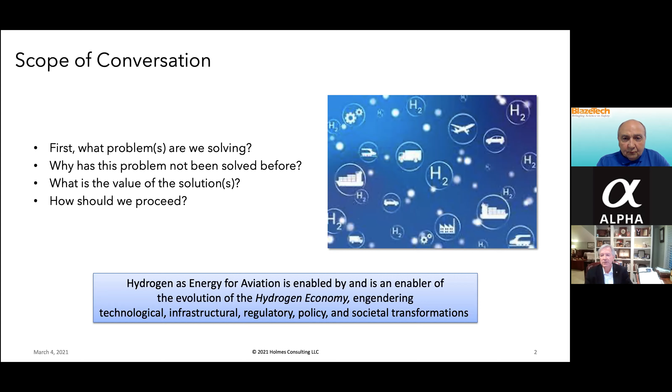I'm going to suggest as a hypothesis that hydrogen as an energy source for aviation is both enabled by and is an enabler of the evolution of the hydrogen economy, of course, engendering along the way the technological, infrastructural, regulatory, policy, and societal transformations that go with it.

Along the lines of what problems we're solving, you can ask this in different ways. Why hydrogen? Well, the obvious ones are air quality, energy independence, and geographic equity. I mentioned earlier that the potential for hydrogen to become divorced from geographic locations is a very important feature of this landscape. And then finally, what appears on the horizon - it may be some decades away before we have gallon-of-gas equivalent pricing - but the affordability of renewable hydrogen generation capabilities, including liquefaction for aviation applications of liquid hydrogen.

What I'd like to talk a little bit about is why hydrogen for advanced air mobility. We're all pummeled every day with emails and web information about the electrification of air mobility, variously called regional air mobility, urban air mobility. I'll say a few more words about where I think the focus can be in the early days of this transformation. But why hydrogen for advanced air mobility?

What I experienced in the few years I spent as Chief Technology Officer at Alaka'i Technologies Corporation, in our development program for a liquid hydrogen powertrain, electric powertrain system for a hexcopter, aiming at about a 1,000-pound payload and a couple of hours of endurance, was the benefit at that weight class.

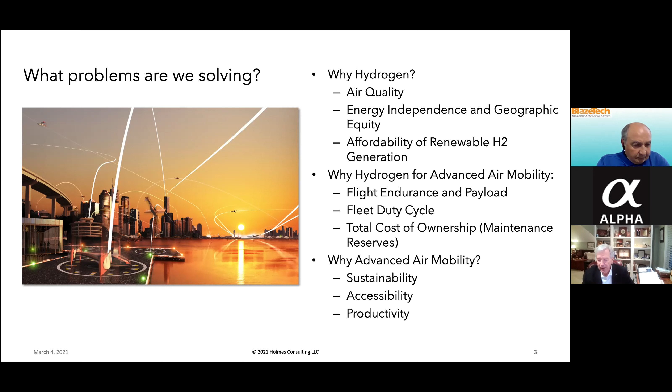So where is hydrogen in service today? I'm fascinated to learn more and more about the implementations that currently exist for hydrogen, and some that are coming along fairly rapidly. I had been unaware there are 40,000 forklifts in the US at about 80 distribution centers, about half of which are owned by Walmart and Amazon, and all of those forklifts run on liquid hydrogen. So there's already a liquid hydrogen infrastructure out there. And if you wanted to do cargo air vehicles between and from those distribution centers, there's a bit of a ready-made potential in that regard.

The cell towers in the country have backup power systems. They had mostly been diesel gensets, and the industry is moving gradually away from those - there are 4,000 cell towers that have backup power provided by hydrogen fuel cell systems. The numbers are small: there are only 1,300 as of 2020 buses that are hydrogen fuel cell powered today. There's a fairly small number of cars that are hydrogen powered today, and a fairly small number of hydrogen refueling stations, mostly in California, but some developing in Massachusetts and a few other states as the hydrogen automobile industry begins to develop some traction.

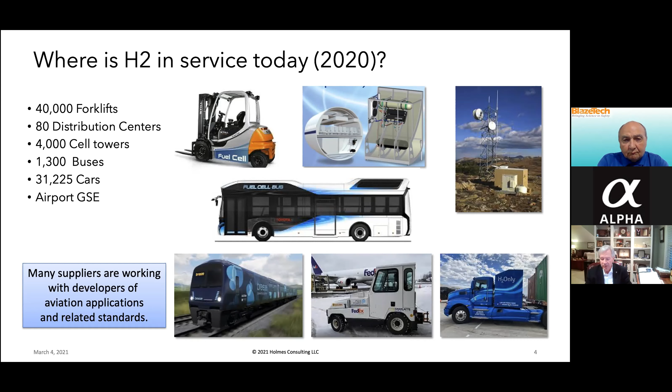Well, the state of the art is, let me just say, minimal today in this regard. Hydrogen fuel cell powertrain technology readiness levels, the TRL scale we're all familiar with, for electric motors is probably fairly high, TRL 5 and 6. There's still much work to be done to advance electric motors in particular - if we can get away from liquid cooling of electric motors for aviation applications, that would be a marvelous advance. Liquid hydrogen tanks for aviation applications are still at a fairly low TRL level, as are fuel cells themselves for aviation. Of course, fuel cells for terrestrial applications are already TRL 9. But then the integrated heating and cooling systems for fuel cells as well are still at a fairly low TRL level.

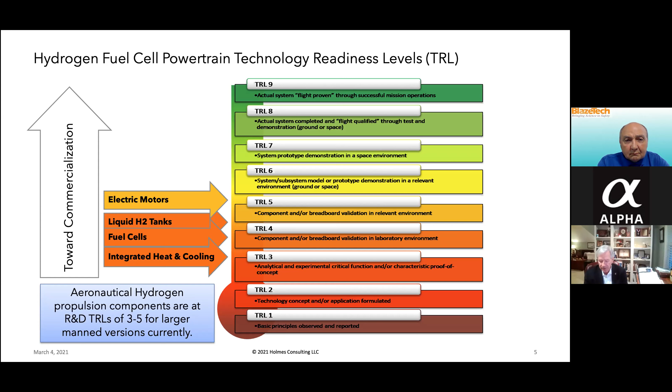So there's much work to be done there to move toward commercialization of hydrogen fuel cells in these aviation applications. So how should we proceed? I'm going to suggest that we start, and many are already, starting with regional, rural, exurban, emergency cargo service applications for air vehicle development. Why? Well, in my opinion, there's a great alignment of hydrogen benefits with mission profile needs.

Those missions require hours of endurance and north of 1,000 pounds, maybe even north of 1,500 pounds of payload, resulting in vehicles of 4,000 and 5,000 pound MTOW class. And so hydrogen provides you with the energy densities necessary to meet those mission needs.

There are also lower technical and regulatory barriers to entry, not the least of which is airspace management in those rural, regional, ex-urban and so forth markets.

There are also more than 5,000 public use airports in the nation today, and there's some interesting statistics around that. 80%, maybe more than that, but I'm going to be conservative, 80% of the nation's population lives within a 20-minute drive of an airport. They're not big airports, of course, but that infrastructure could serve as nodes in a hydrogen infrastructure, especially if the hydrogen infrastructure in those airport facilities could be ecumenical, so to speak. In other words, could serve trucks and automobiles as well, and be used to generate electricity for battery charging.

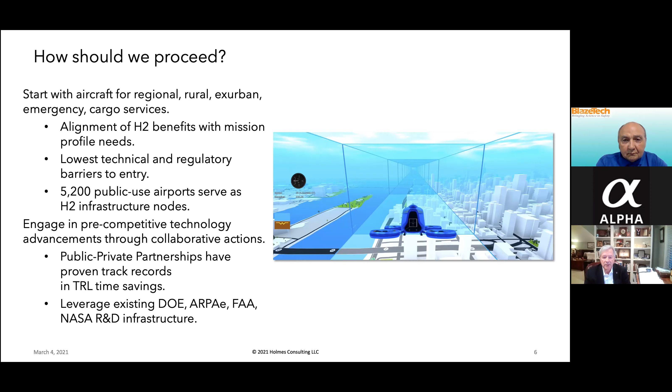So with that, I'll close my remarks and hand the baton back and look forward to the rest of our conversation. Thank you, Bruce.

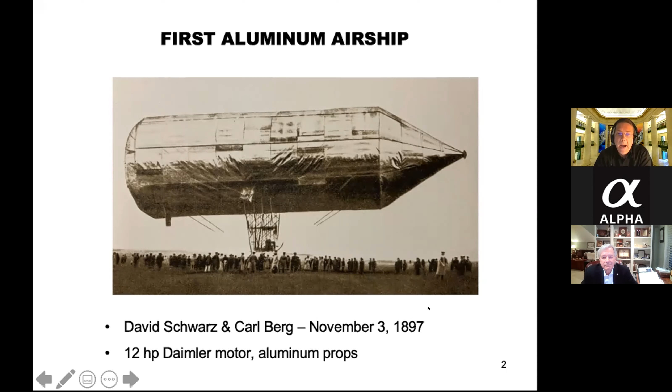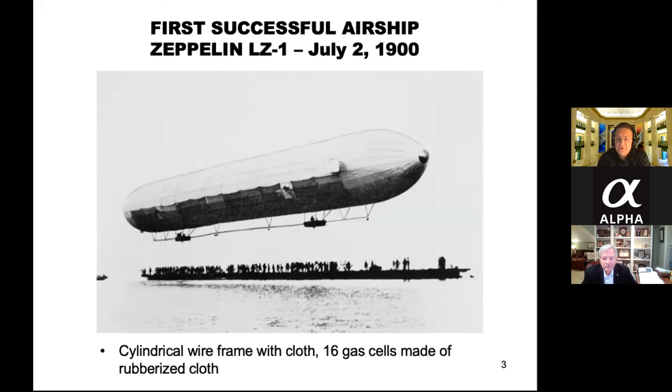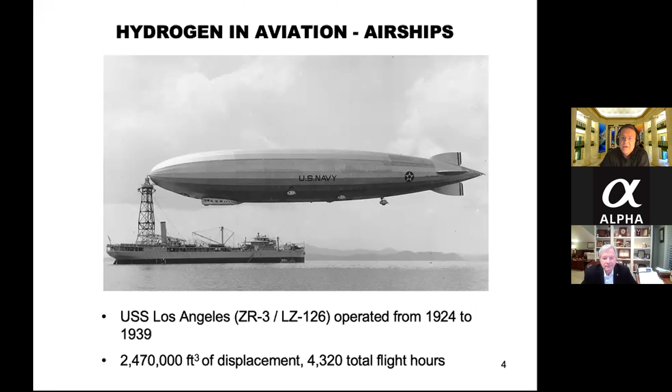So just to summarize the aviation by airships, a total of 120 Zeppelins were built. The most notable one that people know of is probably the Graf Zeppelin, 9 years of service with hydrogen, bigger, 3.7 million cubic feet of displacement, 144 ocean crossings, transported over 13,000 people. It was long trips, from Germany to South America, but this was the way to travel.

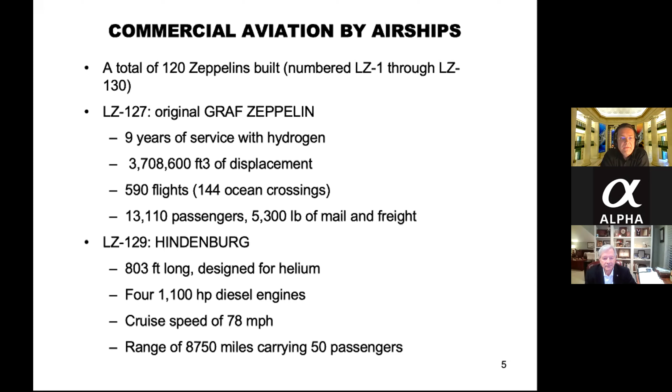And then, of course, the Hindenburg. It was actually designed for helium, despite the US ban on the export of helium under the Helium Control Act of 1927, so it was then operated with hydrogen. As you know, in 1937, there was the Lakehurst accident. But again, 50 passengers, a range of 8,750 miles.

Now, if you fast forward to the mid-50s, it's when Lockheed was working on plans for supersonic reconnaissance aircraft, the Lockheed CL-400 shown here, codenamed Suntan. The goal was to be faster and higher altitude than the U-2.

All this enabled by liquid hydrogen. This is designed by Kelly Johnson at Skunk Works. Unfortunately, it never materialized. There were other issues.

You can see the engines are on the wingtips. There's some serious yaw moment issues when the engines or the inlets unstart. This is also a challenge for the SR-71 or the YF-11 and 12 demos later.

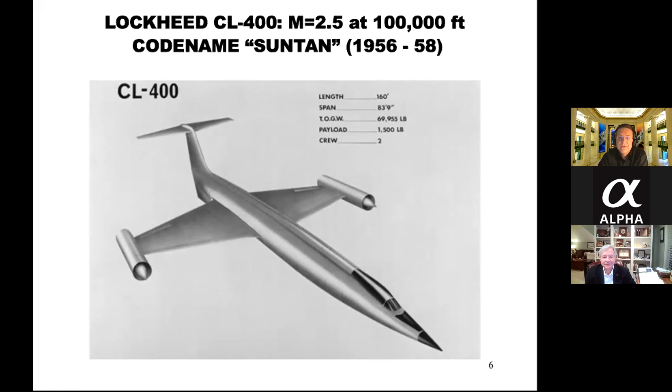Just one shot on the mission profile. Again, a little bit shorter range than the U-2, but higher altitude at 100,000 feet. Supersonic cruise at Mach 2.5, and a sortie of less than an hour. So a very impressive mission profile.

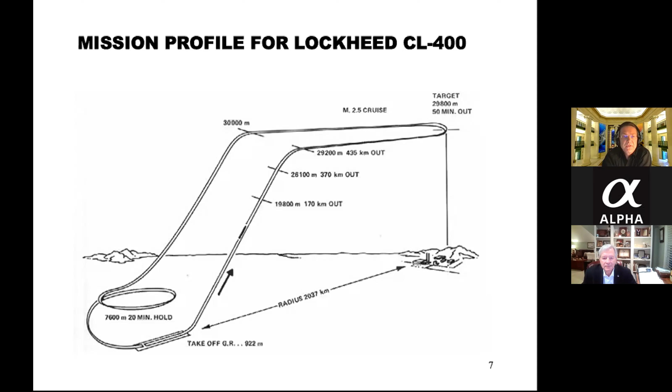This is the engine, the PW304 or Suntan liquid hydrogen engine. And there's a person there to give you an idea of the size.

There were, of course, a number of challenges that had to be overcome. As you know, liquid hydrogen is extremely cold. At atmospheric pressure it boils at, I think, around 415 or 20 F. So conventional materials like steel become brittle. Of course, the advantage is the heating value is 3 times that of jet fuel. The specific heat is maybe 15 times that of air.

So for this particular engine, I think there were 3.5 pounds per second of liquid hydrogen run to produce 12,000 horsepower to drive the fan. And of course, another challenge is the low density, so the tank volume had to be about 5 times that of jet fuel.

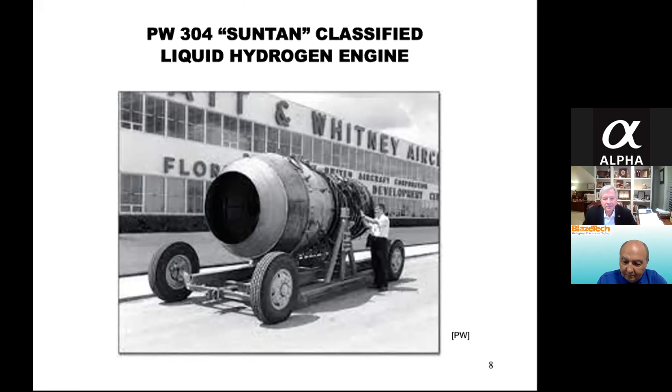It ran on an expander cycle. So here's the engine and there's the cartoon. If you start on the bottom there's a liquid hydrogen pump, external. It's in essence driven by a front tower shaft. It pressurizes the liquid hydrogen to supercritical pressure.

And then if you can see my cursor, there's a heat exchanger to raise the enthalpy. And then that hydrogen expands over a turbine. It's a tiny turbine, so there's a gearbox that's needed between the fan and the turbine. And then that hydrogen partially goes into the primary burner and then the rest goes into the afterburner. So basically, it's somewhat a core of a rocket engine. If you think of the compression fan being replaced, the LOX turbopump and that feed line.

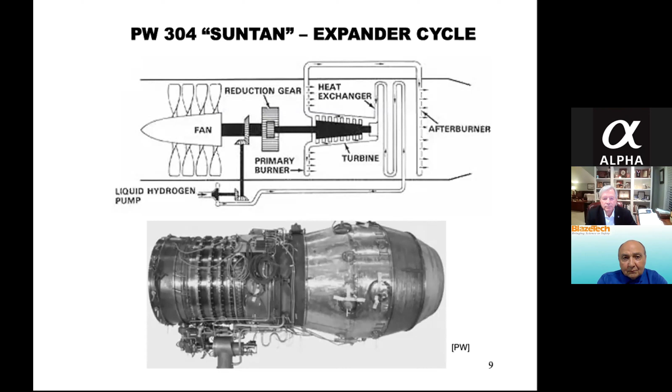Here's a picture of the 12,000 horsepower reduction gear. I think the turbine ran at 25,000 RPM, compressor maybe at 6,000. So an impressive piece of engineering back in the 50s, maybe the origins of the gear for the GTF.

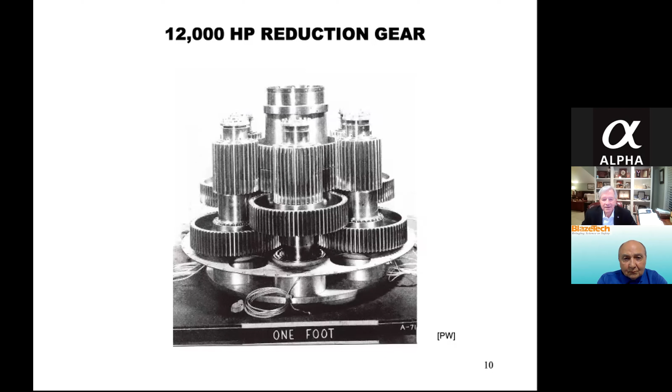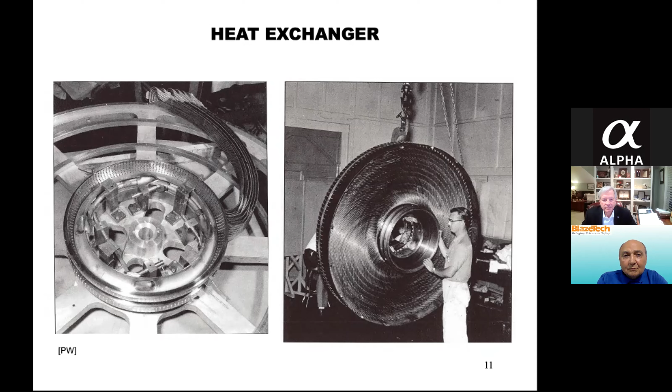And then, the hydrogen came in, you pressurize it still at 20 Kelvin. The heat exchanger took it up to 1,000 Kelvin, and then combustion gas entered the turbine at maybe 1,500 Kelvin. So lots of heat transfer, maybe 72 million BTUs per hour, enough to heat 700 6-room houses.

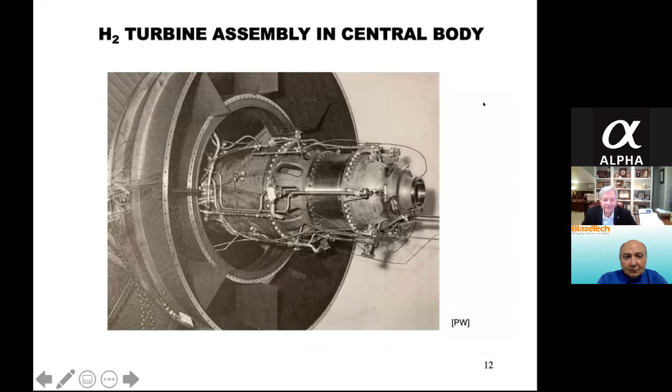Give you an idea of the size of the hydrogen turbine. It's tiny, in essence inside the central body. So to the left, you see the fan, and then the key or the core of it is, of course, the liquid hydrogen pump shown here.

It's 2 centrifugal stages back to back. If you see my cursor over here, it's an aluminum star wheel for stress concentrations at high speed. And for those of you who are turbomachinery enthusiasts, note that they're radial blades, which of course yielded a reduced stable flow range.

Another critical problem was that an impeller was required that would handle liquid hydrogen without cavitation, and adequate sealing between the high pressure liquid hydrogen at 20 Kelvin and the oil lubricated bearings. So very cold one end, very hot the other end.

I think 5 engines or so were built for development. But as I said, the aircraft had some hard problems like the lightweight insulation, seals, and so forth. So the CL400 was never fully built. Of course, the choice of aluminum really limited the flight Mach to 2.5. So kerosene type fuels become viable again at Mach 3 plus.

So go back to the 50s, the secret enablers were titanium and the J58 convertible engine, both originating at Pratt. In essence, they made the SR-71 possible. So by the end of the 1950s, Suntan was dropped and the focus was really on the SR-71. Now, in terms of learning, hydrogen technology and all the learnings were applied to the rocket engines. For example, the legendary RL-10, the first hydrogen-fueled rocket engine, was based on some of these ideas.

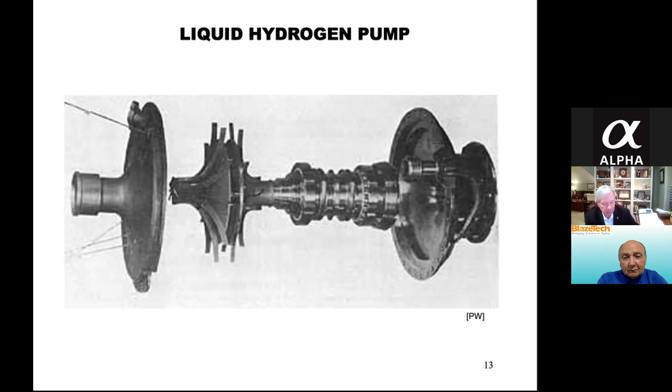Okay, I think Bruce put it very well. So here are maybe some other numbers just to sort of lay out the grand challenge for 2050.

If you run the ICAO calculator, 1 kilogram of kerosene yields about 3 kilograms of CO2. So fuel flow on average, maybe at altitude, is on the order of a kilogram per second. If you multiply this figure with the number of aircraft flying at any given moment, things accumulate and escalate pretty rapidly. So there are several hundred million tons per year - 915 million tons in 2019. If we don't do anything by 2050, this will double to maybe 1.8 billion tons.

So therefore there are some very tough goals. The IATA 2009 global target is a 50% reduction. I think in February this year, the EU launched a sustainability initiative called Destination 2050, which will require all flights within the EU and the UK to be CO2 net zero. And then with the new US administration, there's the ambitious target of a net zero economy by 2050. So this is in line with the Paris Climate Agreement.

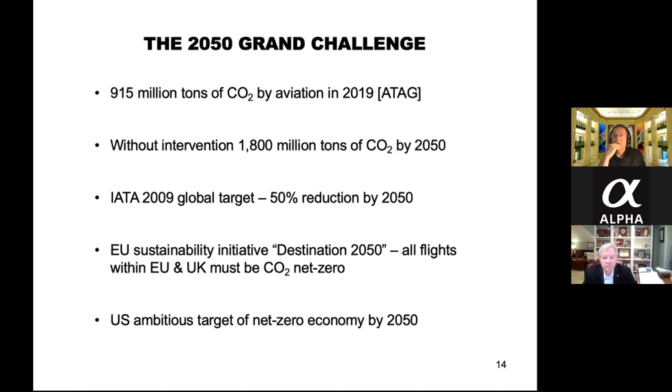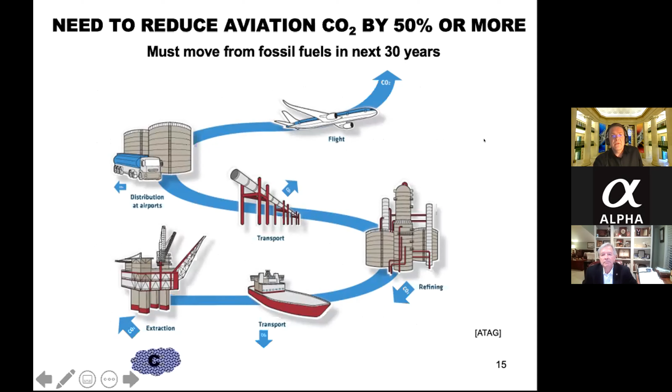I think you all know this, but this is the current carbon life cycle diagram. You extract carbon from the ground, you transport it, you refine it, you transport it again. There's more distribution, and then you use it as an energy carrier in an aircraft. So CO2 emissions occur in each and every single step here. The takeaway is we have to move from fossil fuels in the next 30 years, and time is really short if you contrast that to the life cycle of an aircraft, maybe 20 to 30 years.

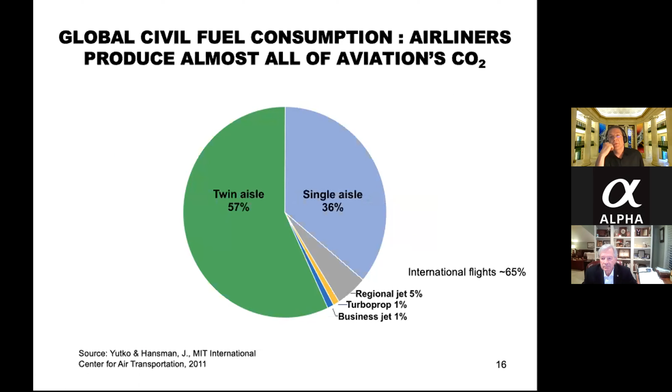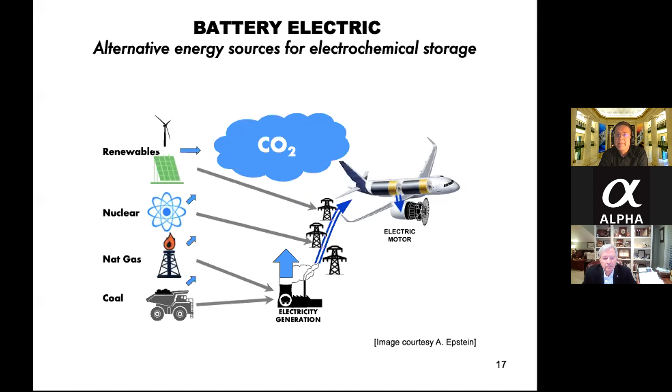Of course, lots of attention has been given to battery electric and hybrid electric concepts. But no matter what the energy source, there will be CO2. The bottom line is that batteries need to be charged, and even if you use renewables, they will have a small amount of CO2 emissions.

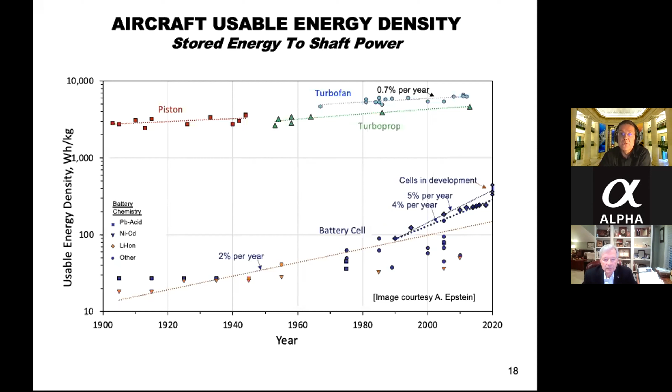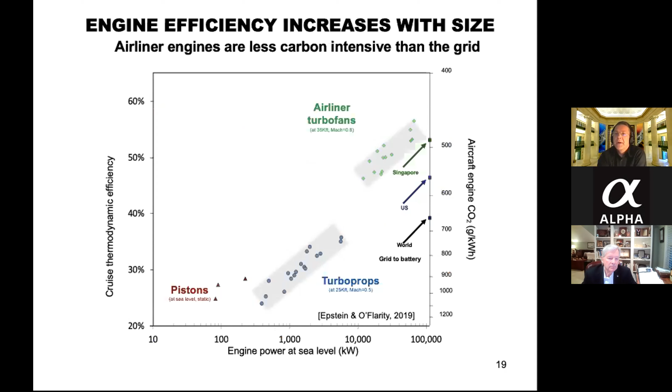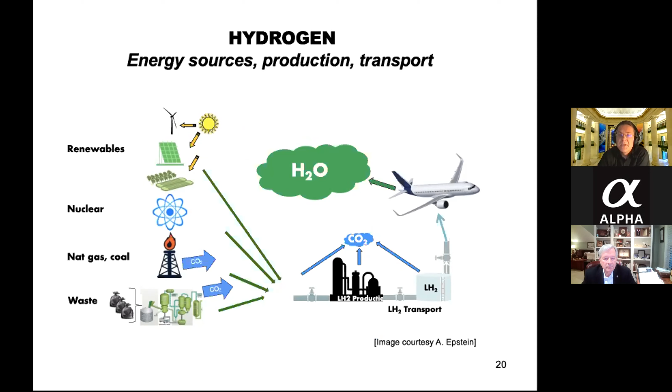And what's to come is blue hydrogen. So the source is a fossil fuel and the CO2 released is captured, so we call this the blue. There's of course other ways to do it, to stay or to meet the low carbon threshold, and that's maybe to use non-renewable energy sources such as nuclear power. And then the end goal is green hydrogen, which not only meets the low carbon threshold, but is generated using renewable energy sources such as solar or wind.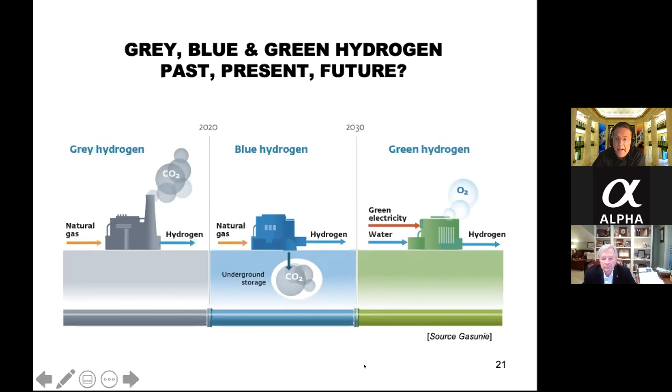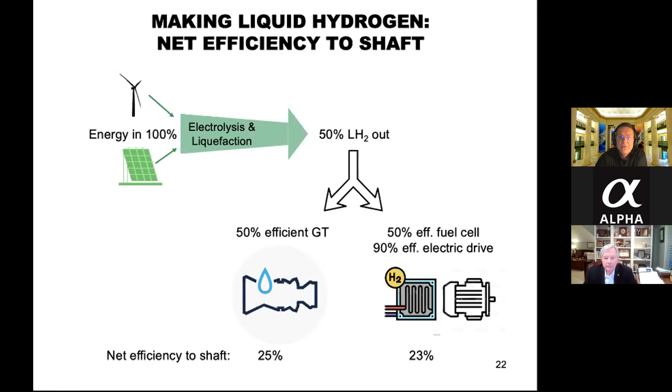Now, another challenge is storage. So two choices: gas versus liquid. The transportation industry has been demonstrating some very sophisticated technology. The left is from Toyota, that's the Mirai fuel cell car. If you look at it, the hydrogen's at 700 atmospheres and the fuel mass fraction is only 6%.

If you look at the Boeing Phantom Eye on the right, the vehicle is in essence the fuel tank, right? And fuel mass fraction is 53%, but you have to keep it very cold. So the challenge is either very high pressure with super low mass fraction, or very low temperatures, and again a challenge with the size. The other challenge, of course, is boil off. So for this tank shown here, the measured boil off is maybe 2% per hour, so you lose close to half per day.

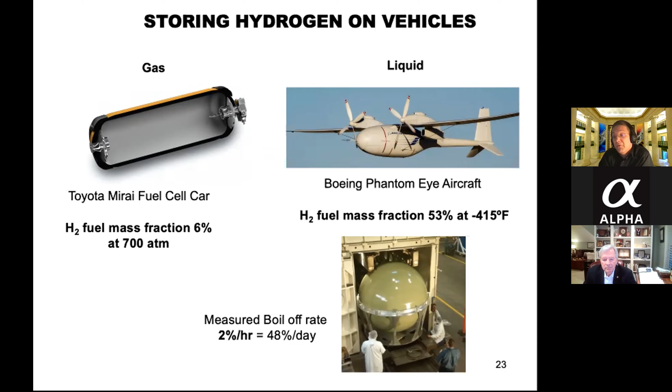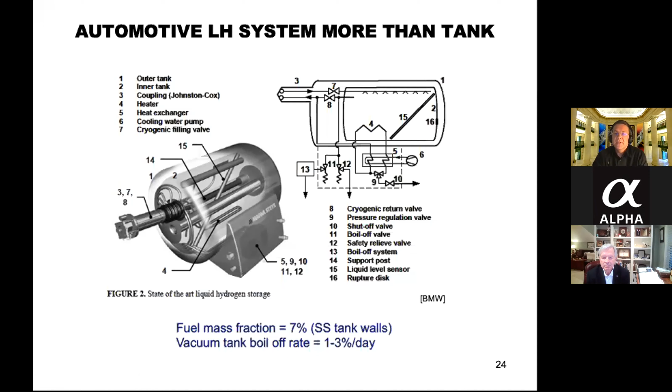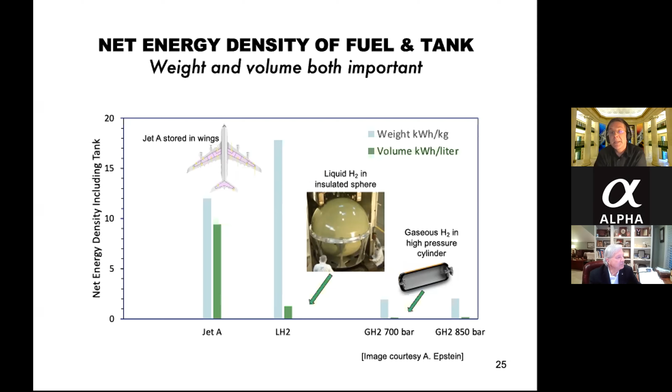Okay, so going back to aviation, what we have here is different options. You've got Jet A, and then you've got liquid hydrogen. Both gravimetric energy density and volumetric energy density matter. So for going to hydrogen, of course the gravimetric energy density, that's the light blue, increases, as we said, but the challenge is the volumetric energy density. So if you look at where the fuel is, it's stored in the wings -- there's just not enough wing. So we have to store the liquid hydrogen in the fuselage. And the gaseous option is very challenging if you look at the numbers. So again, just pasting these things together, you take maybe a state-of-the-art tank, look at the Beech 1900.

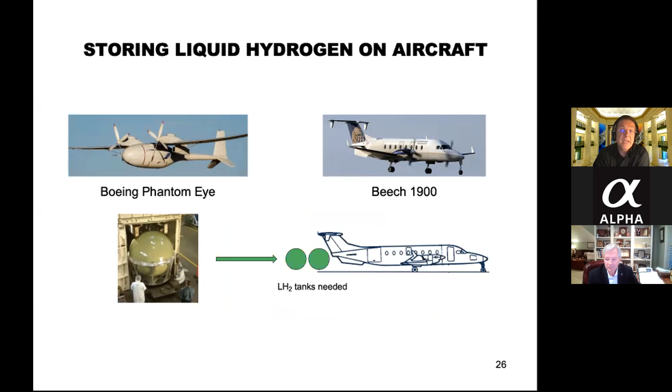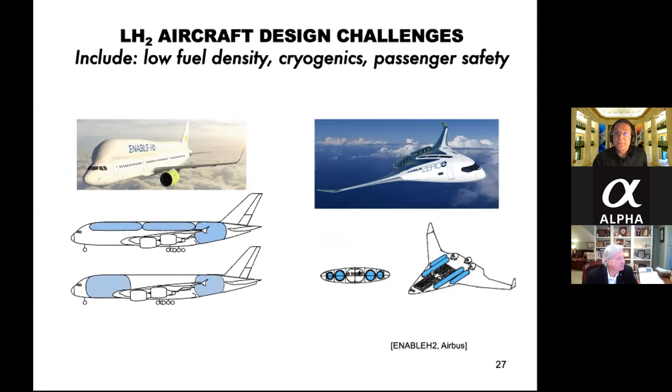So maybe let me close, because the panel is about looking into different possibilities and maybe just stimulating a conversation here. Sustainable aviation fuel is maybe another option. There are very different pathways for SAF, different sources such as waste or biomass. Again, the energy source could be renewable or nuclear, but yes, there is carbon dioxide impact.

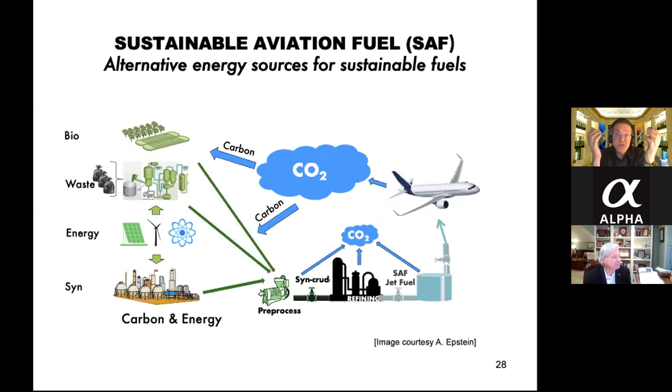Possibly the best we might be able to do at some point is this diagram here, which is the carbon life cycle diagram for sustainable aviation fuel. One example could be the so-called electrofuels. So you would use renewable electricity to convert CO2, which you either capture from industrial processes or directly from air, into SAF. And you could deploy this anywhere in the world, but of course, initially likely near existing industrial facilities or close to sources where you have the renewable energy.

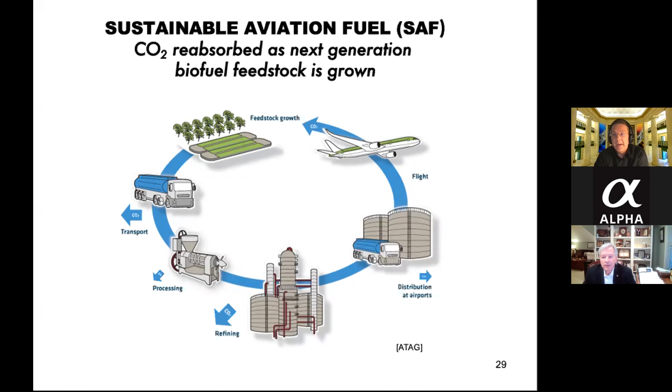Things are in the works. Some of the technology is being demonstrated at lab scale, showing promise, but much more work is needed. Some parts are very mature and in common use, such as the Fischer-Tropsch processing, but other challenges remain, especially scaling things up. And of course, cost is always a big driver, maybe the driver.

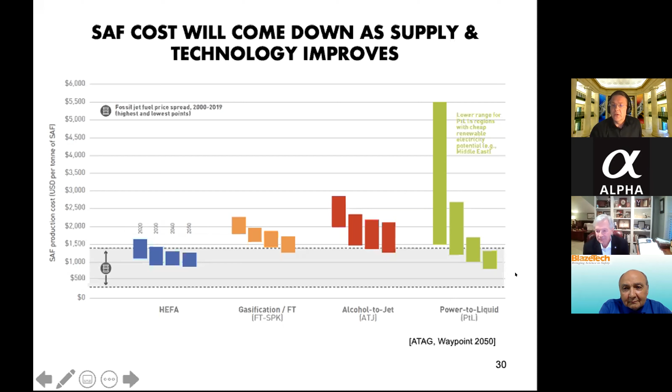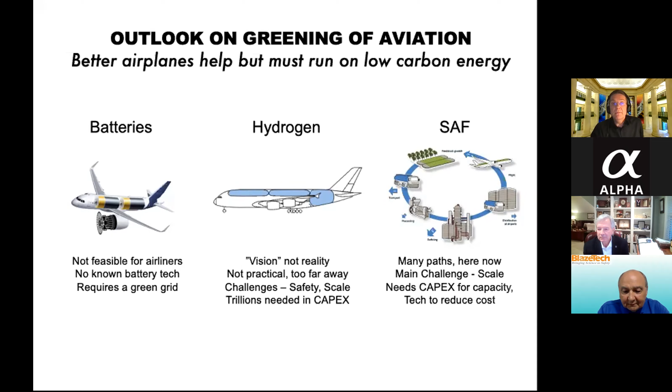The two panelists now have covered really a very broad range of issues, which is good because it could start the conversation. My first question to Bruce.

Let's see if I understand what you said in terms of the market segment that you focused on, which you called regional, rural, etc. So are we talking fundamentally about small planes up to, let's say, an Embraer type, as opposed to not the 737? Is that a correct statement? That's correct. Yeah.

I'm unaware that the kinds of trade-off studies have been done to figure out where the boundary is between efficient battery solutions and the requirement for liquid hydrogen powertrain solutions. But just based on our experience, my past experience, I suspect that boundary for the hydrogen solution being favorable starts somewhere at payloads of around 1,000 to 1,500 pounds. And I don't know where the upper limit of that is, but I suspect that it's not much north of an air vehicle gross weight, I'm thinking fixed wing here, of somewhere in the neighborhood of 20,000, well, 19,000 pounds would be a convenient number to pick because of the new rule, the new regulations under Part 23 for airworthiness certification.